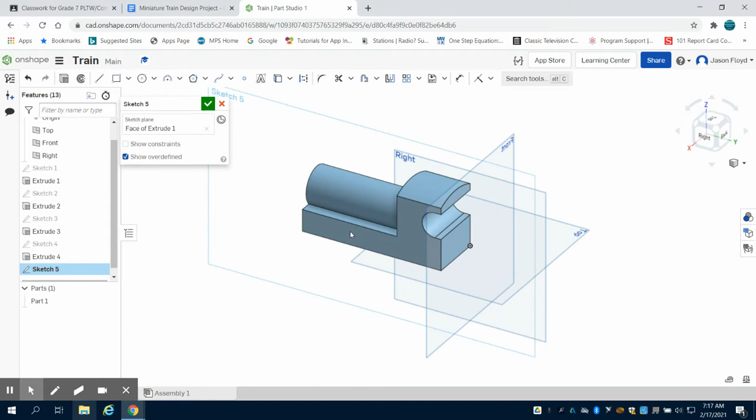So I'm going to create a sketch and place it on the side right here. I'm going to orientate myself and grab my circle tool. You could do this with points in the holes, but I'm choosing to do it with the circle tool, and I'm going to make a 0.25 circle.

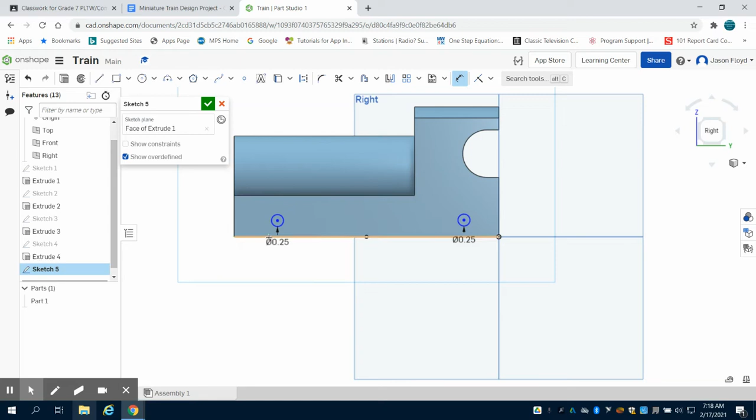0.25 inch circle. I'm going to dimension these a half inch from the bottom line, and I'm going to do the same to the rear one. Both of these get dimensioned 1 inch from the front and 1 inch from the rear.

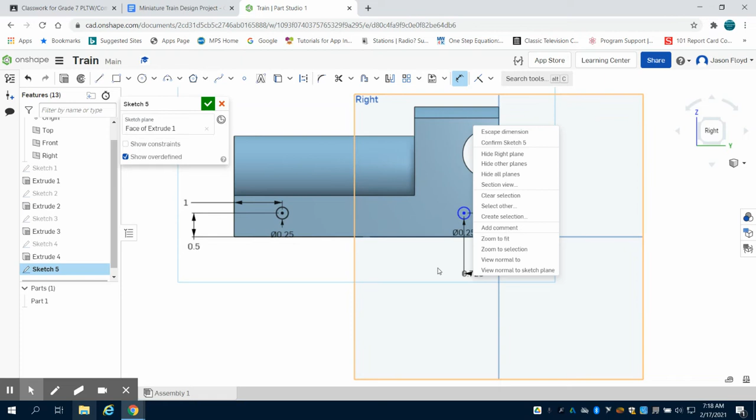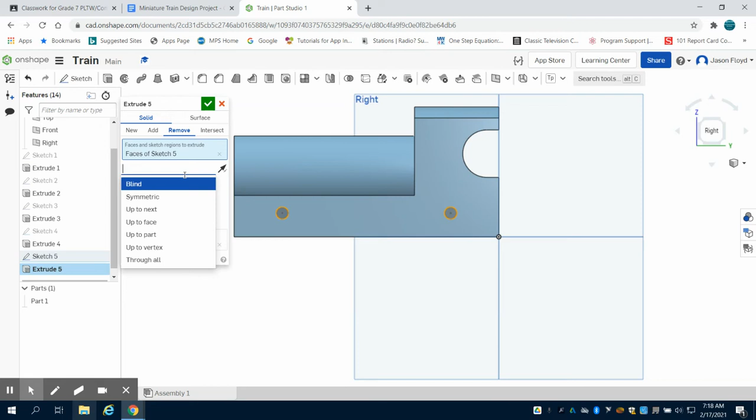Let's escape that dimension. Now I can click on extrude, remove, and then I'm going to choose through all. So I have those holes drilled in place.

I'm then going to come along to my front. I'm going to place a sketch on the front of mine. And now for that cow catcher, I'm going to do the same exact thing. This time I have a set of 3 holes that I need to make.

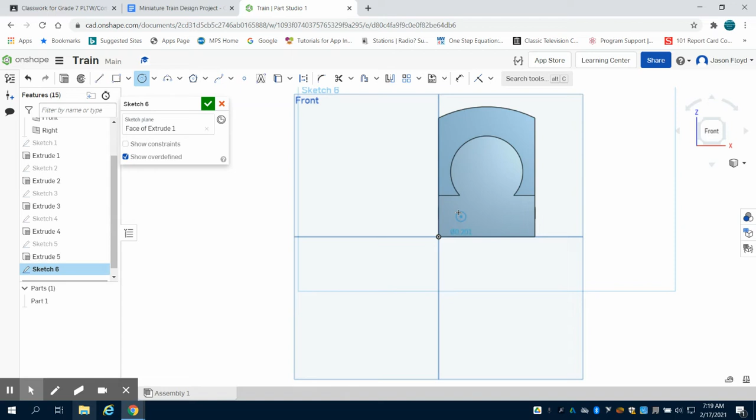And these holes are 0.125, and again I have 3 of them. Now I'm going to dimension these, first 2 from the bottom, 0.125 up as well.

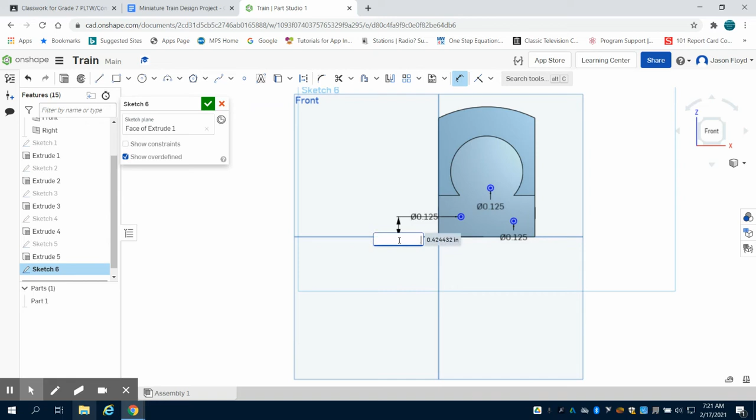From their closest sides, I'm going to dimension them 0.375 is what I want to do.

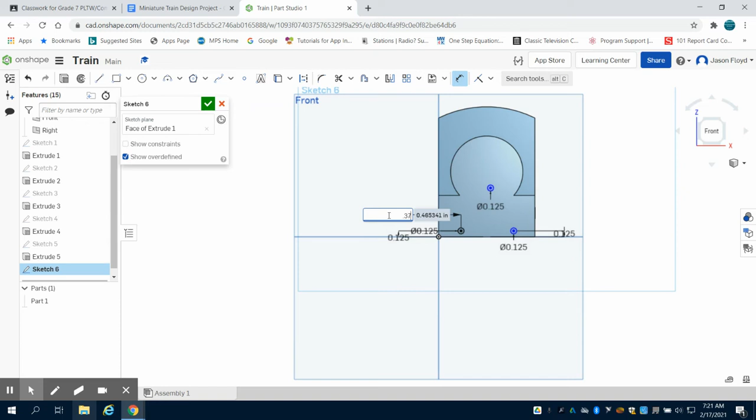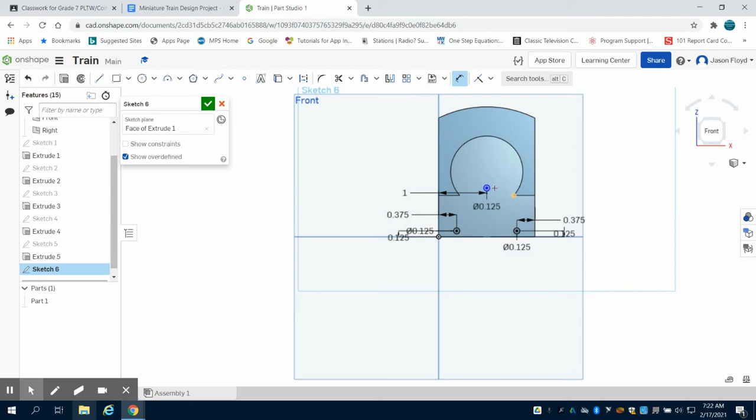Now the top hole gets dimensioned in the middle here, which will be 1 inch. And we're looking from the center point to the bottom, which is going to be 0.625.

I'm going to come up here to my extrude. I'm going to click on remove, and I want to remove 0.125 inches worth of material. So that'll give me a good opportunity for that cow catcher, as we can see there, to attach.

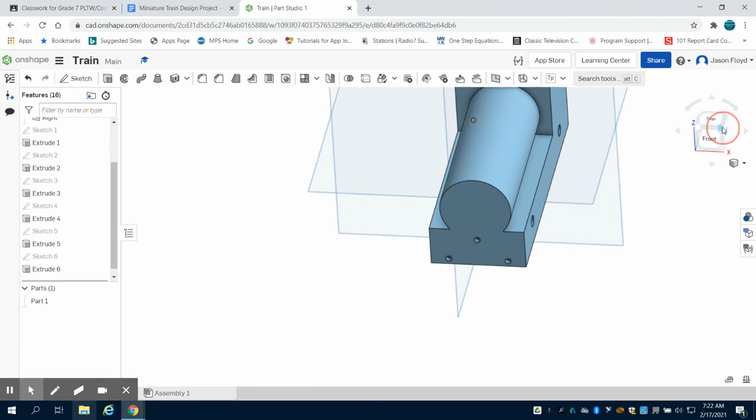I have to flip around to my back side now. I'm going to lay my sketch down on the back right here, and then I'm going to orientate myself to that. I'm going to grab my circle tool and draw a 0.25 inch circle on the back.

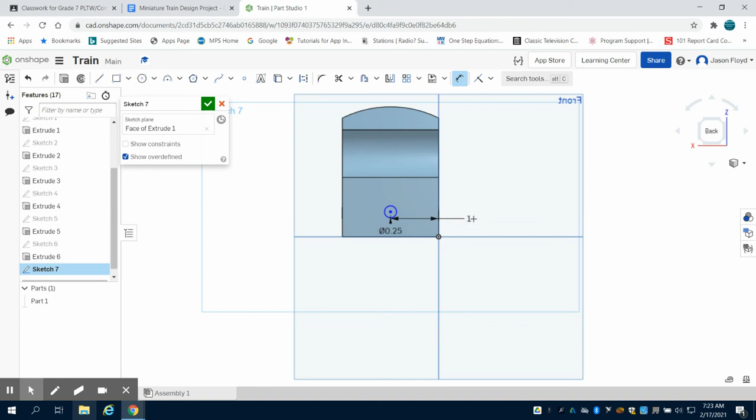This circle needs to be centered, so we're going to move it to 1 inch. And coming up from the bottom, we're going to be that same 0.375.

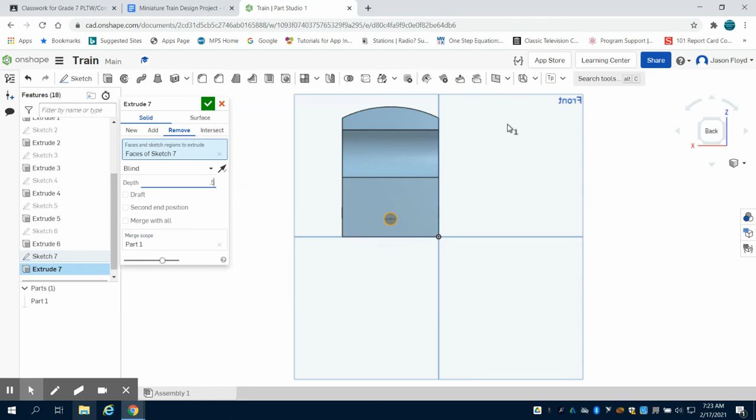Now the next thing we're going to do is we're going to click on extrude. We're going to do a removal, and our depth of this removal is 0.5 inches. This is where our peg will go and our attachment to attach train cars to.